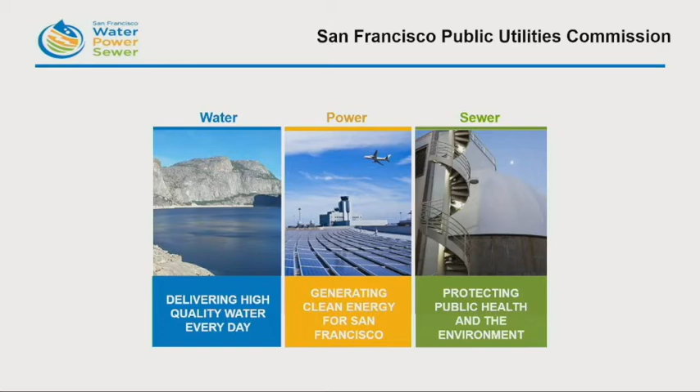We have adopted a One Water San Francisco approach to our resource management, and what that really means is moving away from a traditional water in, wastewater out model, really looking towards a more holistic approach to our resource management, and that involves strategies like on-site water reuse.

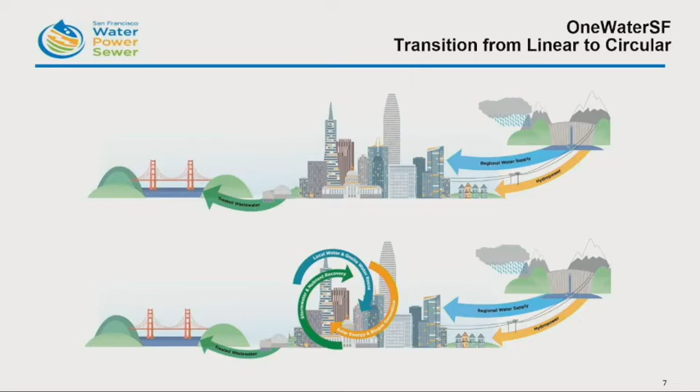On-site water reuse is fundamentally in line with our One Water SF philosophy because it's really about matching the right resource to the right use.

In San Francisco, we are focused primarily on our local water program in the Water Resources Division. And what that really involves is 4 key program areas: water conservation, developing new groundwater supplies, recycled water supplies on a centralized scale, as well as decentralized non-potable water systems.

I'm going to focus on this last program area today. Decentralized reuse is really a way that the utility is looking at expanding our water supply portfolio, recognizing that buildings produce water. So buildings, you can imagine there's a lot of different water sources that buildings can produce.

For example, rainwater, which is, just as a refresher, precipitation collected from roofs, stormwater, which is precipitation collected at grade, foundation drainage, which is really that nuisance groundwater that gets pumped out to sewers with sump pumps, gray water, which is wastewater collected from your clothes washers, your bathroom sinks, and your showers, and then black water, which is really all of your building's wastewater.

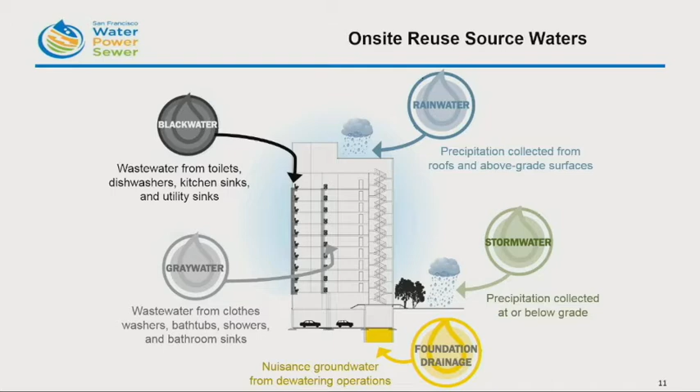On-site reuse is happening all throughout the world. It's not a new technology. I'm going to go through some examples.

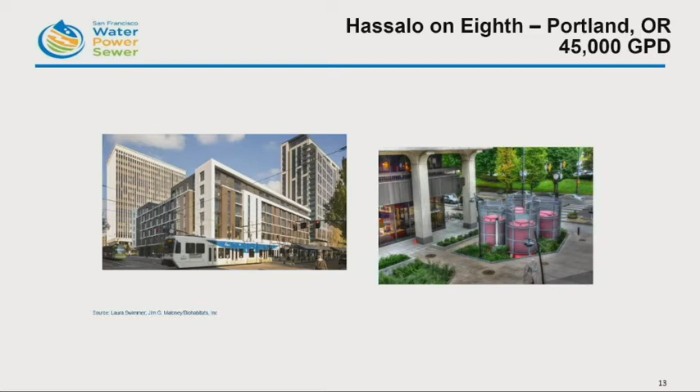For example, Hassalo on Eighth is a district-scale wastewater reuse project happening in Portland, Oregon. They are harvesting wastewater from 4 urban city blocks, treating that and reusing it for toilet flushing, cooling, and irrigation within that whole downtown area.

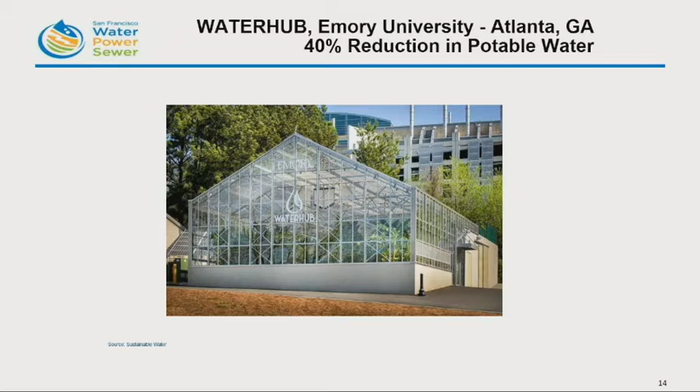The Water Hub is another example of a wastewater reuse project happening in Atlanta at Emory University. They are capturing and treating that wastewater for cooling purposes as well as future residential buildings' toilet flushing, and they're achieving a 40% reduction in potable water use with that system.

So as I mentioned, there's interest from both the utility side in terms of developing new local water supplies to make our supply and portfolio more resilient. But there's also been interest from the private sector as well that's interested in doing innovative and sustainable things to get LEED credit and meet their own sustainability goals.

The PUC headquarters building has an on-site blackwater treatment system where we're using an engineered wetland to treat all of our building's wastewater, reusing that for toilet and urinal flushing in our building. And we've been able to offset 60% of our water consumption with that system.

And then on the private sector side, an example is the St. Anthony's Affordable Housing Building, where they are capturing rainwater from their roofs and treating it and reusing it for toilet flushing.

In San Francisco, we are leading the way with our non-potable water program, which was established in 2012 through an ordinance added to our health code. That ordinance highlighted the roles and responsibilities of the 4 city agencies involved in administering our program. I can go into a little detail about who those players are.

The San Francisco PUC is involved with program administration, so that's tracking projects and helping administer the program, as well as another division within our organization that manages our cross-connection control program.

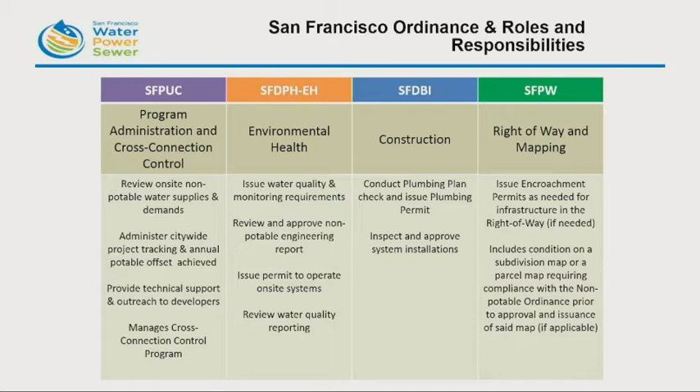We offer a whole host of technical and financial assistance to projects, designers and developers. Just a couple things I wanted to highlight: our non-potable program Guidebook, there's a couple copies up here, feel free to take those on your way out. That really highlights our 8-step permitting process that we've established and makes it user-friendly and easy to read on how to comply with our requirements.

Our Non-Potable Calculator is an Excel-based tool that helps projects understand what their water demands are on site for toilet flushing and other non-potable uses like irrigation, cooling, that kind of thing, and also determining how much volume you can get from supplies like gray water, rainwater, and black water.

And then our financial assistance, we have a grant program, our non-potable grant program, which offers grants for projects that are installing these on-site treatment systems and want some financial assistance to get that project going. We offer $100,000 grants, $250,000 grants, and $500,000 grants, depending on how much potable water your project is proposing to offset.

Our program has evolved over time. As I mentioned, it was established in 2012, and it allowed individual buildings to capture water on site, treat it, and then reuse it for non-potable applications. In 2013, the ordinance was amended to allow for district scale reuse, sharing water across two or more parcels for non-potable applications.

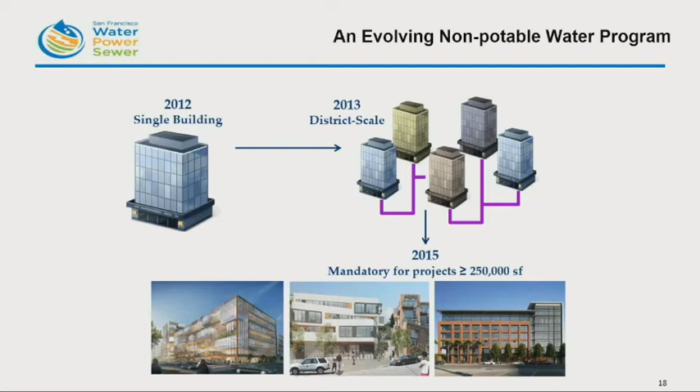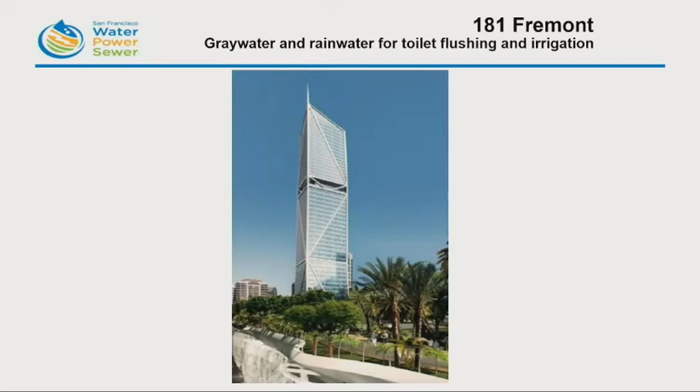Some examples of projects happening here in San Francisco: 181 Fremont is just commissioning their system, and they are doing gray water and rainwater reuse for toilet flushing and irrigation.

Salesforce Tower, many of you know, is the tallest building west of the Mississippi, and it's proposing to install a black water treatment system for toilet flushing, cooling, and irrigation.

The Chase Center is a mandatory project falling under that 2015 ordinance requirement. It's an arena for the Warriors basketball team being built in San Francisco's Mission Bay neighborhood, as well as 2 accompanying office towers. That project is capturing rainwater, stormwater, gray water, and condensate from those 3 buildings, treating it in one system, and then reusing it for toilet flushing and irrigation in the arena as well as the office buildings.

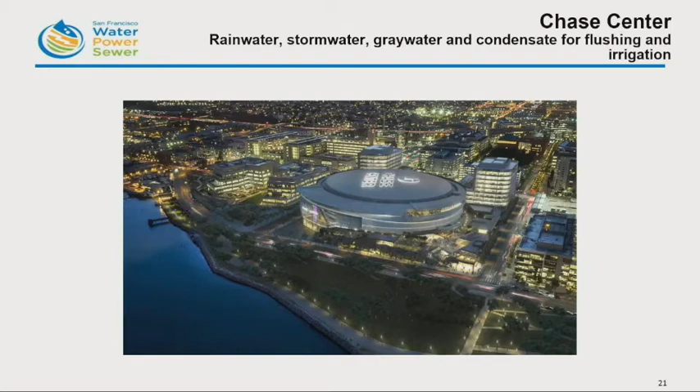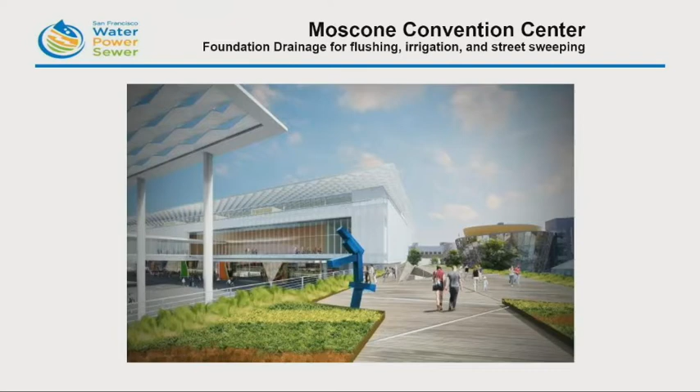Moscone Convention Center recently went through an expansion of their facility, and with that expansion, they installed a reuse system to reuse foundation drainage that's currently millions and millions of gallons of water being pumped to the sewer, so they decided they wanted to capture that. They treat the foundation drainage and reuse it for toilet flushing within the convention center, irrigation, and a street sweeping truck fill station to allow DPW trucks to come and fill up their trucks and then clean the streets of San Francisco.

We have spent a lot of time in San Francisco addressing challenges and barriers around on-site water reuse, particularly around water quality and governance issues. On the governance issues, we have collaborated on a national level through the National Blue Ribbon Commission for On-Site Reuse, which involves several different stakeholders throughout the country, water and wastewater utilities, as well as public health agencies, all coming together to address how to come up with a consistent way to permit and oversee these types of systems that's protective of public health.

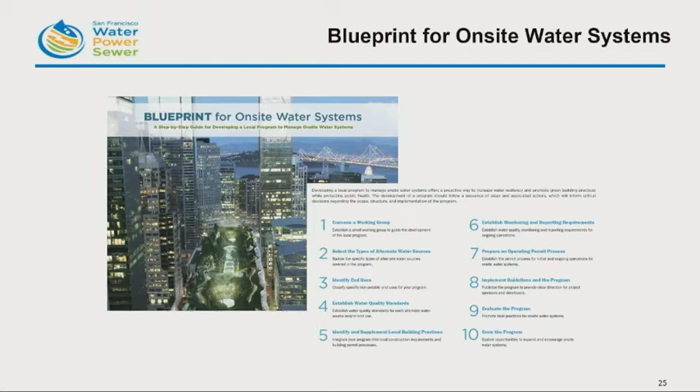Some of the efforts that came out of that include this blueprint for on-site water systems, which is a guidebook that goes through the 10 high-level steps you need to take to set up an on-site reuse program in your community.

On the water quality front, we've done significant research to address what appropriate water quality standards these systems should be meeting. I won't go into too much detail because Sarah's going to get into it in her presentation, but what came out of that research effort was this report. It's called the WERF report, and it established a risk-based water quality approach, looking at reducing exposure to pathogens like virus, protozoa, and bacteria. It's achieving water quality that's fit for non-potable uses, and the framework really emphasizes treatment processes and continuous online monitoring in real time.

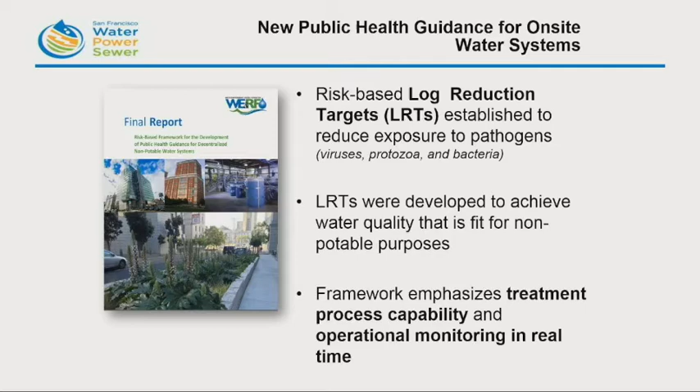As a result of the work we've been doing, many jurisdictions throughout the country have been able to move forward with this risk-based water quality approach, which is really exciting. In San Francisco, we amended our program in 2017 to update our water quality requirements to be aligned with these risk-based standards. In California, we sponsored Senate Bill 966, which directed the state board to develop risk-based standards on a statewide level for California for on-site reuse, and that passed into law last year.

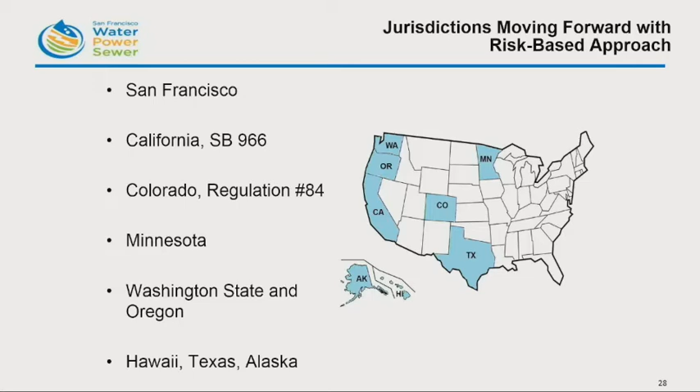Colorado amended their Regulation 84, which is allowing decentralized black water treatment systems in Colorado. Minnesota has published guidelines, and Washington and Oregon have recently introduced legislation similarly modeled on SB 966, and Hawaii, Texas and Alaska are a few other states that are following suit. So it's really exciting.

I'll end with this slide on some future work we are pursuing: a training manual for engineers, operators, utilities, and regulators. What that manual will do is identify the skills and knowledge required to design and permit systems under this new risk-based water quality framework. It's estimated to be completed mid-2019. So with that, I'll hand it over to Sarah.

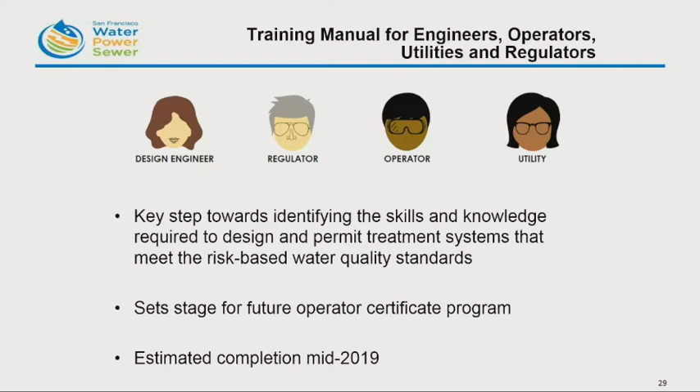All right, thanks, Taylor. So I'm going to talk a little bit more about what we're doing in San Francisco with water quality and treatment for on-site reuse systems.

As Taylor mentioned, in 2017 the San Francisco Department of Public Health updated the rules and regulations to incorporate these new risk-based pathogen log reduction targets. Our primary focus of doing on-site reuse is to protect public health. We really want to make sure that's a priority. So this framework emphasizes continuous online monitoring, making sure our treatment barriers are working, and also looking at our treated water quality.

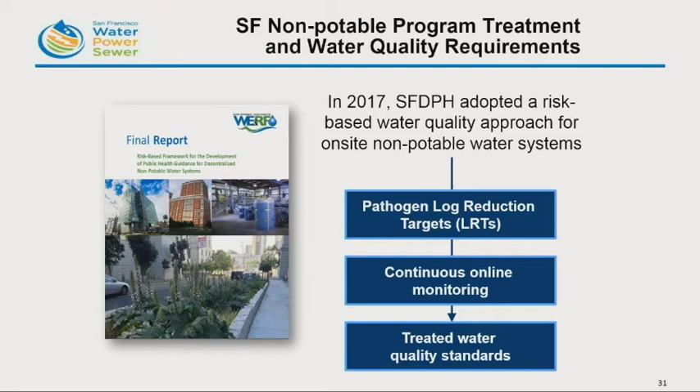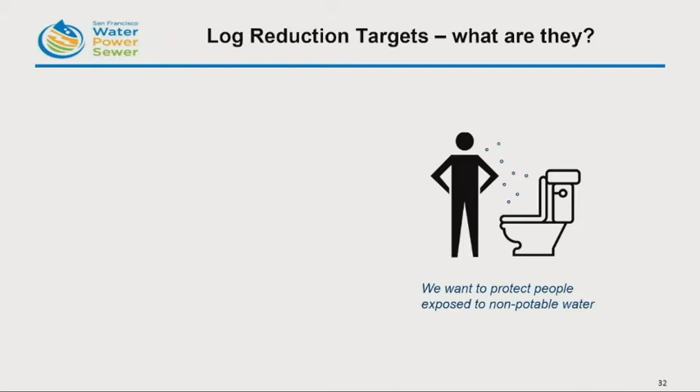So what are these mysterious log reduction targets? We want to protect people who are exposed to this non-potable water. When we use the water for uses like toilet flushing and irrigation, there is exposure from people to this water, and we want to make sure that it's safe. So we're targeting a certain water quality to be used when we flush our toilets and do irrigation.

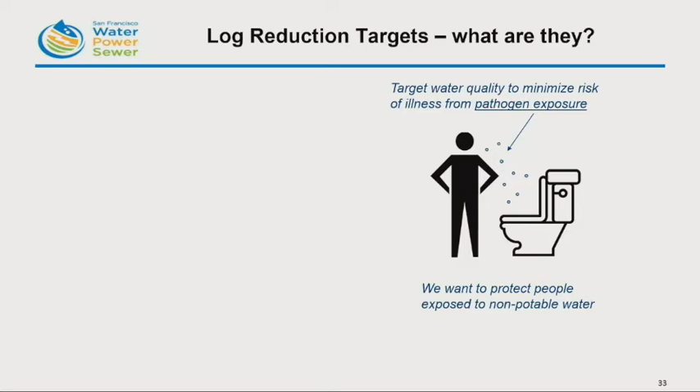And we have all of these different potential alternate source waters like black water, gray water, and rainwater, and these all have different water qualities. So we know where we need to get to at the end when we're flushing our toilets, and we understand where we're starting, and it depends on what kind of water we're looking at. The log reduction target is all about getting us from where we're starting to the safe place that we want to be.

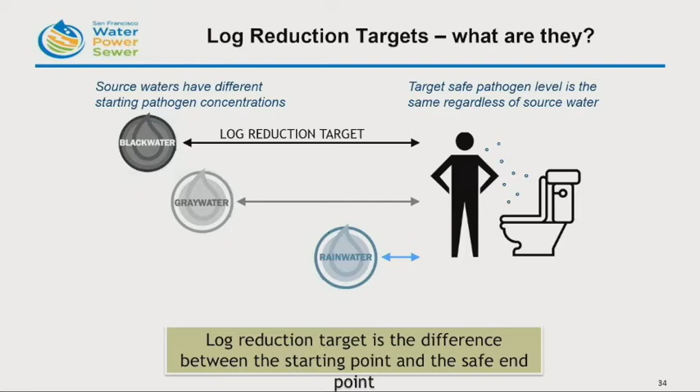The goal of these log reduction targets is to match each specific source water with the appropriate end use and create a water that is fit for purpose. Our LRTs are generating non-potable water. I just want to be clear that the goal is not to create potable quality water. This is fit-for-purpose water for toilet flushing, irrigation, cooling, and these other non-potable applications.

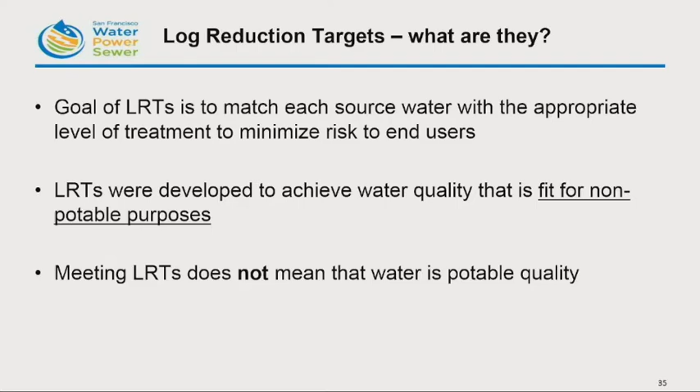So we really care about pathogens. That's super important. This is our main public health risk. But there's other things we need to think about when we're talking about picking treatment for these systems and making sure that the water quality is appropriate for the end uses.

So I've talked about the pathogens. The other main categories are organics and solids. What is that? That's all of the crud that's in this water - that's our poop, and that's all the detergents or shampoo or all the stuff that's coming into these different waters. And this can present a couple different challenges, because having all this stuff in the water can make it hard for our treatment processes to be effective.

And it can also be challenging to make this water aesthetically pleasing, which is really important for public acceptance of this water. And so when we're talking about organics, these are compounds that are in the water.

They can impact our disinfection processes. So when we chlorinate our water or when we use UV light, if we have too much stuff in the water, it can really impact the effectiveness of those and impact our ability to remove pathogens.

And also, if we end up with a bunch of organics in our water going out, that's basically food for bacteria that can grow in our pipes, creating this kind of colored, smelly water that we really want to avoid. And same with solids - these can also impact our ability to do disinfection effectively, and we also don't want this water to be cloudy and turbid when it goes in our toilets.

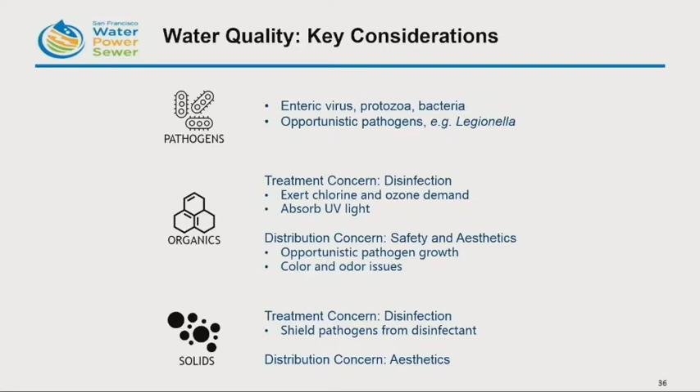And so this is just to give a rule of thumb of what we're expecting to see with these different source waters. I really want to emphasize that the water quality of these can vary really significantly based on site-specific conditions.

And so if you're somebody designing a treatment system, it's really important to consider your specific type of building, commercial versus residential, the type of fixtures that are there. You know, in San Francisco, all these new buildings have low-flow fixtures that can impact how concentrated these waters are.

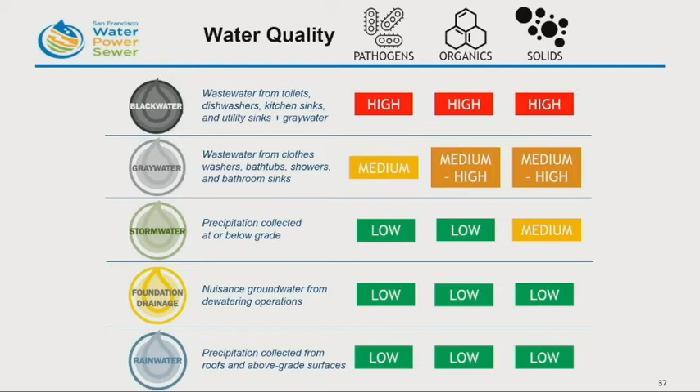But obviously, in general, we would expect that black water is going to have the most crud in it. And we're seeing that gray water can also have, because of things like low flow fixtures, pretty high organics concentrations as well. And then moving down, we're obviously going to expect to not see a whole ton in rainwater that's being collected from a roof.

And so once we kind of understand the water quality of these different source waters, it's important to identify the appropriate treatment so that we can meet our pathogen log reductions and meet our water quality standards. And so depending on the type of water you're treating, you might need different types of treatment.

So just some things to consider, if you do have black water or gray water with really high organics, probably biological treatment in some form is going to be the best way to do that, whether that's a membrane bioreactor or whether that's the engineered wetland type of system that we have in our own headquarters.

And then filtration is going to be the most effective way to remove solids. And again, there's so many different types of technology that I won't go into, but it's important to identify what's in your source water and where you're trying to get to in order to pick an appropriate technology. And then finally, disinfection will be our final barrier against these pathogens that we're trying to remove.

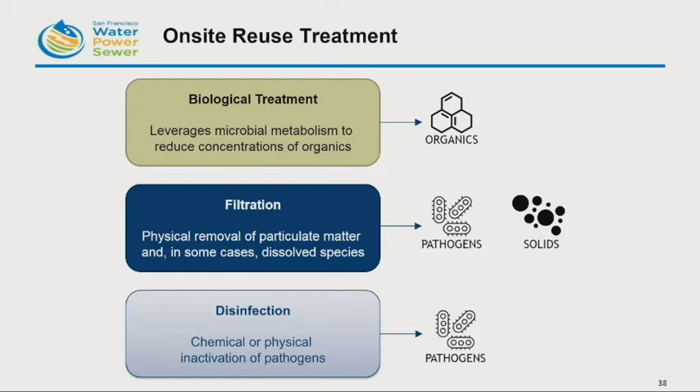So I just want to give a couple examples of some treatment trains. The top one is an example black water treatment train. This is not the only possible train, this is purely to illustrate an example.

But this is showing the use of a membrane bioreactor, which combines biological treatment and filtration into one process. This can be a really effective way to get a lot of treatment done in a pretty small footprint. And then followed by some UV and free chlorine disinfection. My little boxes here are just illustrating the importance of using online monitoring to verify that all of our treatment barriers are working as we want them to be working.

And then in contrast, the rainwater system that I'm showing on the bottom can be a little bit simpler because, as we saw, we don't have as many pathogens, solids, or organics in there. So you can use a simpler type of filter followed by some free chlorine disinfection. So again, we're really trying to provide the right amount of treatment for a particular source water.

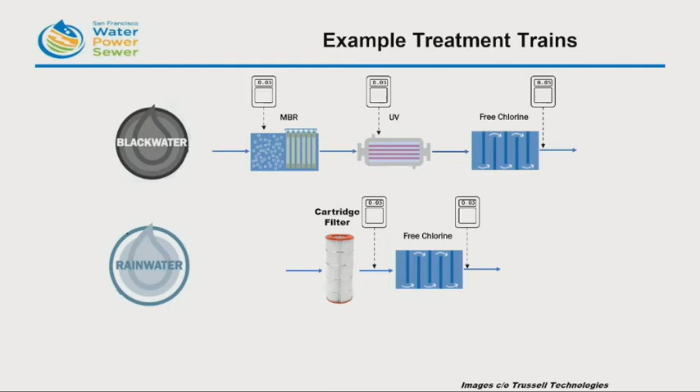And I'm going to just talk about a couple of lessons learned that we're learning as we implement this program and some new things we're thinking about moving forward. So just some things we're seeing for treatment design of these alternate water source systems.

With black water, as I mentioned, color can be a really important consideration for treatment. If somebody goes into a bathroom stall and they see yellow water, they may flush the toilet before using it, which is kind of defeating the whole purpose of conservation in the first place. So there are technologies that can be used to address that issue. Free chlorine, ozone, these oxidants can be used to reduce the color of this water.

As I mentioned, gray water - we are seeing that in San Francisco with all of our low flow fixtures, we can end up with pretty high concentrations of organics in gray water.

And so we may need to be seeing biological treatment being used in these gray water treatment systems. And with rainwater, I want to highlight the importance of, if doing rainwater harvesting, consider how you can maximize the benefits of both non-potable reuse and stormwater management.

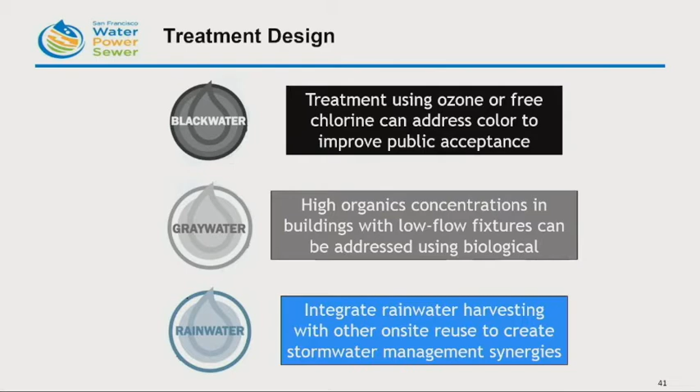As we move forward, we're really focused on, as these systems come online, getting more data, improving our technical assistance to projects, learning more about how much water our buildings are generating and the patterns of how they're using water, things that can help us improve the design of these systems.

We're also working toward an operator certificate program to make sure operators have sufficient capacity to keep these systems working effectively. And we're supporting additional innovative efforts in San Francisco.

Things like breweries who want to reuse their process water on site, and also things like atmospheric water generation, integrating heat exchangers into on-site reuse so we can improve energy efficiency.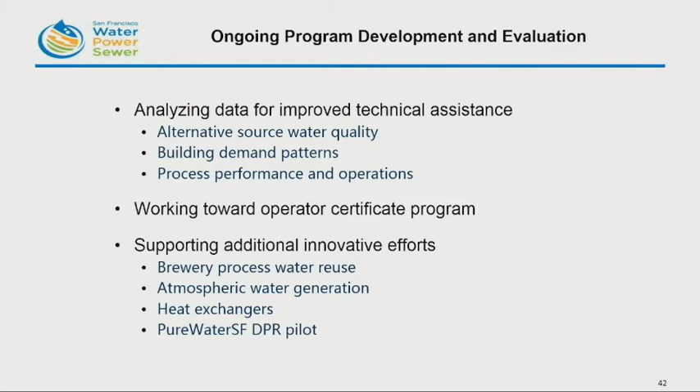And we also do have a potable reuse pilot going on in our building. If you want to learn more, we're happy to talk more about that.

So implementing a first of its kind non-potable program takes time. It takes many dedicated stakeholders. It's an ongoing effort, and we are always continuing our research and planning efforts. We're looking forward to gathering new data, improving our technical assistance, and moving this industry forward.

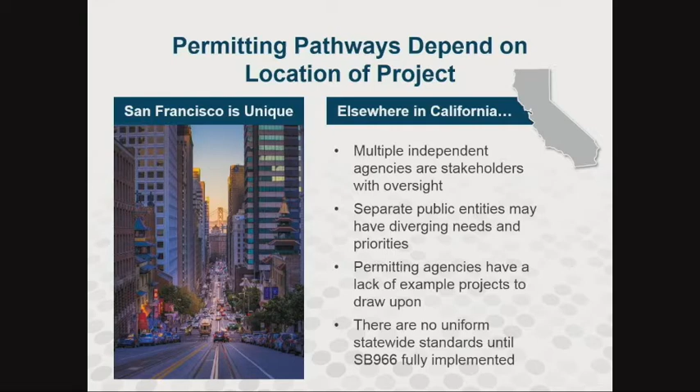And this is a summary. It was the first of its kind in the nation, on-site reuse legislation, and there's a few years on this before it's fully implemented, but by December 2022, we expect to have statewide regulations on public health-based standards for these systems.

And by 2023, building standards. And as Senator Wiener pointed out, what this is going to do is it's going to give cities the tools that they need to really advance water recycling in the on-site reuse area.

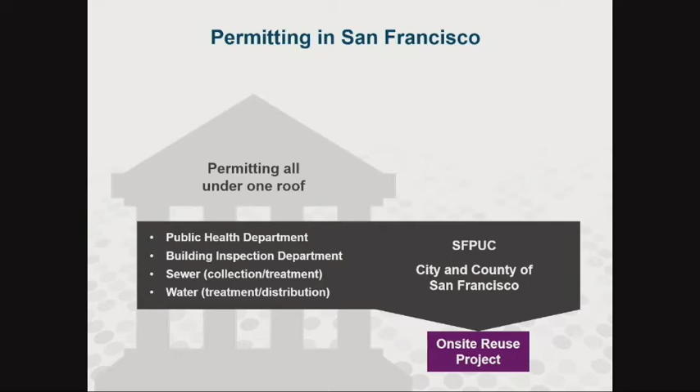And I want to put this up to summarize what I was saying, which is that if you're in San Francisco, the permit process flows very smoothly, easily. And not to say that it doesn't flow smoothly outside of San Francisco, but you have a few more agencies that might be involved.

In fact, this illustrates what you might find if you're proposing a project elsewhere: a rainbow of permitting options. And at the very top of that is the Regional Water Quality Control Board. Here in California, the Regional Water Quality Control Boards and the Division of Drinking Water are responsible for promulgating and making sure that Title 22, which is the state water recycling regulations, are adhered to.

Here in San Francisco, because they already have a permitting program developed and approved by the state, they have permission to issue permits on their own. But elsewhere, at least until SB 966 is fully implemented and cities adopt those regulations, for the next 3 or 4 years the regional board and DDW will be involved in permitting a system if you want to implement it.

These systems produce water to reuse on site, but they also produce a waste stream from these membrane bioreactors, and that has to go somewhere. It typically goes to the public sewer, where the sewer district and possibly the municipal wastewater treatment plant will want to review that discharge to make sure it works with their operations. We're also likely to see separate health and building departments involved, and county health departments often handle cross-connection tests, so you need to coordinate with them, as well as the air district or a separate water entity.

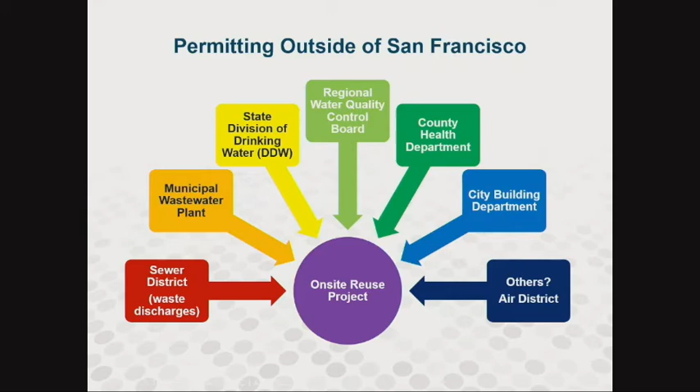It doesn't mean the process is harder, there's just more people you need to coordinate with up front, and it can still go smoothly as long as you're aware of all the permitting agencies that may be involved. The big takeaway: before you design a system, find out who the permit stakeholders are, who has an interest in this, and meet with them early to find out their requirements and avoid surprises. Because if they're surprised, you may find you need to make changes, or your project may be delayed.

I put these up here - not all the things you might find, but some ones I want to draw your attention to. As I mentioned, the first several involve the waste discharge from these systems.

Sarah talked about water clarity and needing to remove organics. These systems are very site specific. For some, it may make sense to put in a reverse osmosis treatment system, and if you do, you typically generate a brine. You might think the salts just end up more concentrated and that would go to the sewer system - it's already there, just more concentrated. But if the agency you're discharging to already has a municipal wastewater recycled water program with high salt concentrations, you may need to look at other options for disposing your brine, or go with a different process, possibly an ozone process.

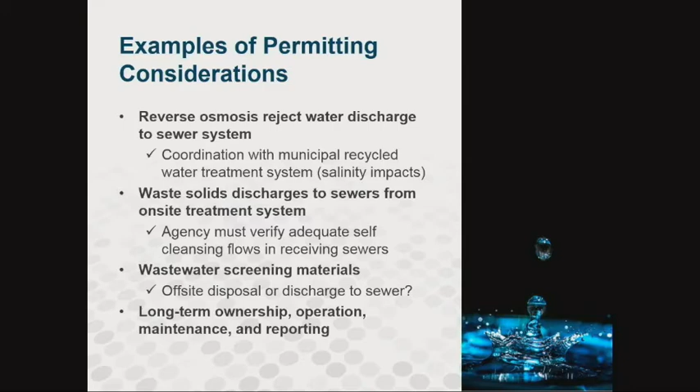San Francisco has standards for operator certification, and as part of the Blue Ribbon report that's being developed, that's something you want to have lined up when you go in, to make sure your project will meet those requirements.

Lastly, I want to share a couple of examples outside of San Francisco of projects that took a different permitting pathway. One is the Facebook system by the Dumbarton Bridge at their headquarters in Menlo Park. It's in permitting now and hopes to be operating later this year.

It's a membrane bioreactor that will treat about 90,000 gallons of wastewater from several buildings on their campus for toilet and urinal flushing, using a membrane bioreactor and reverse osmosis. This system was provided by Aquacell, which does a lot of these systems.

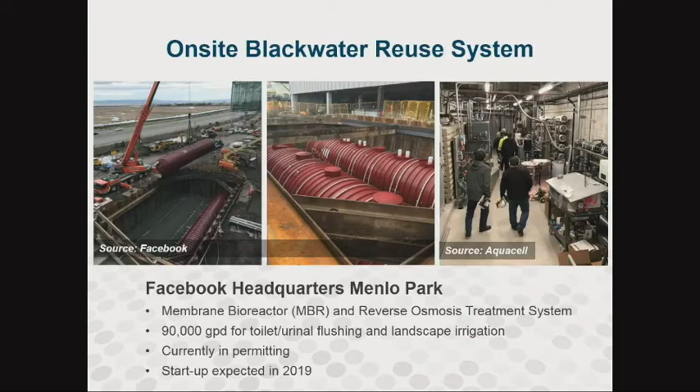The other one is Microsoft, a little further south in Mountain View, which is expanding their campus. They're in the process of permitting and will be constructing that, hopefully operating next year.

It's going to be net zero for non-potable water, so the only potable water used will be the drinking fountains and sinks in the building. It's going to reuse all the wastewater on site, about 4 million gallons a year, and will also incorporate some rainwater into that project.

I also wanted to acknowledge Natural Systems Utilities, Sherwood Design Engineers, and WRNS Studio, who were project proponents and partners in that project.

A number of us just returned from the State Water Reuse Association Conference, held in Los Angeles this year. A few years ago we might have seen one or two papers on on-site reuse; this last year there were two complete sessions on on-site reuse, showing the growing interest in this topic.

By the way, for those interested in learning more about trends in water reuse, the conference next March will be here in San Francisco. I encourage all of you to attend and check it out.

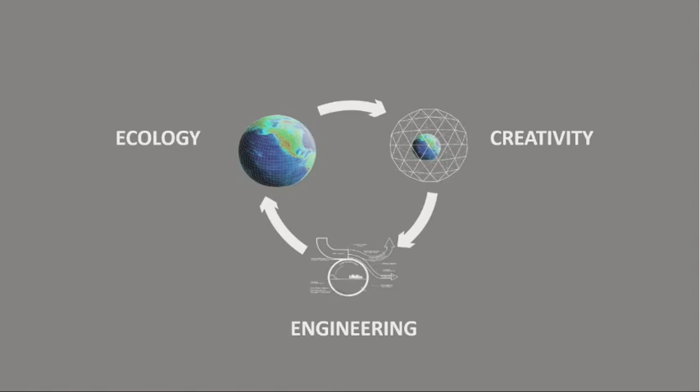Sherwood Design Engineers focuses on the intersection of ecology, creativity, and engineering, working in a very interdisciplinary fashion. We are a full site civil engineering firm.

So just to start the conversation, why are we doing this? What's the rationale? I think Taylor and Sarah did a great job walking you through why the City of San Francisco has taken on such initiative in on-site reuse. So understanding why, either outside San Francisco or if not required, you might take on an on-site reuse project. Who are the project stakeholders? That was really covered, so I won't go into it much here, but it ranges from the design engineer to the utility to the regulator and the operations side.

What project at what scale? I'll get into that a bit in this presentation. Financial feasibility I'll also touch on—it's very site specific, so there's no one solution for how you might look at the finances for one of these systems. And future readiness and phasing—I'll talk about that when we discuss benefits.

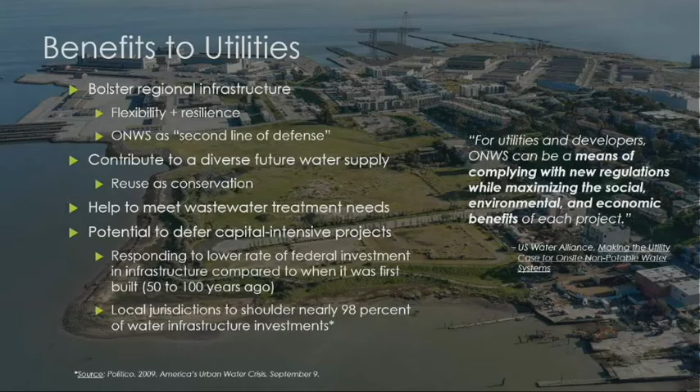I think we're going to keep going here. How do you pay for this investment, right?

So that's kind of from a private perspective. This all seems fine and good, but it seems like it takes a lot of money.

So I think first we want to understand that we're in a changing infrastructure environment. We're in a world where there's not as much investment coming in from the federal side as there may have been when this infrastructure was first built.

So making sure you're assessing the true costs of the project if you weren't going to build such a system, and assessing life cycle costs to determine any first cost offsets. So if you build this system, might you not have to build something else? I mentioned some of the less tangible benefits.

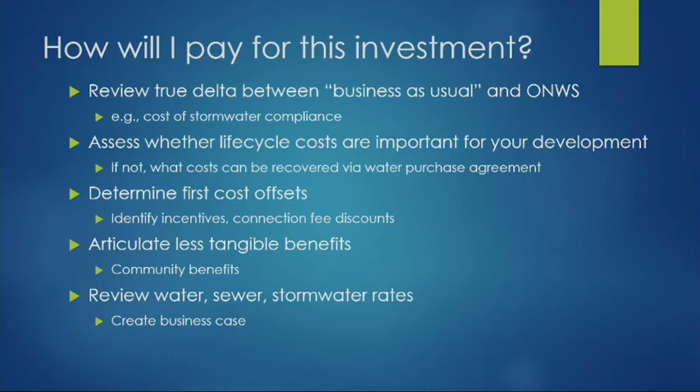Keeping in mind that water infrastructure is also not optional. It's not a question of should I invest in it or should I not - you're going to invest in it, and so we just need to do it in a smart way.

But sometimes we are starting to see that there are simple paybacks that you can do. There may be an opportunity to demonstrate a real business case for implementing some of these systems.

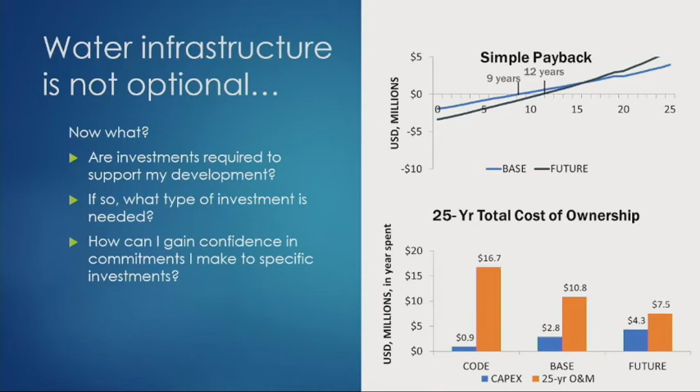So if new investments are required, what's the type of investment, and how can I gain confidence early on in my project that this is the right investment? Focusing on those questions really early on will make sure your project is successful, that you've chosen the right project at the end of the day.

So you can insulate yourself from these rising rates of water and sewer. You can potentially reduce some of your connection fees. I'll give the example in San Francisco, you do get a credit for your water meter connection based on your non-potable system. So there's crediting systems like that.

Also ways for utilities to gain some income back if people are buying less water - more water conservation means there's fewer folks buying that water. So shifting from a volume rate to more of a fixed rate and finding other revenue streams for utilities, making sure it works for both parties.

I mentioned the return on investment and other benefits. Maybe if you build a system like this, you are actually enabling yourself to do something more creative with a site that you wouldn't otherwise have been able to do.

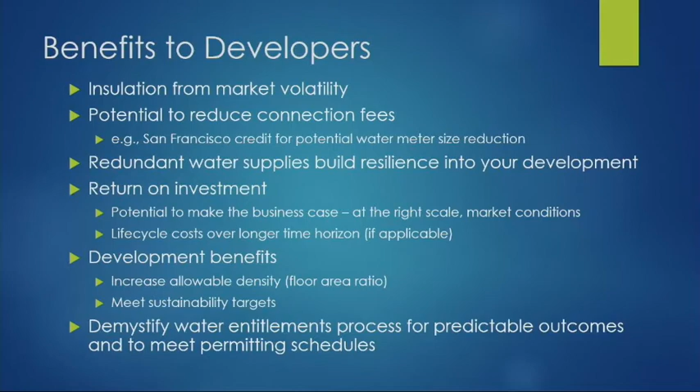But at the end of the day, Dawn touched on the permitting process, and I just wanted to highlight this - during Q&A we can get into it if there's time. One of the most important things that structures like the PUC and others nationwide are setting up is that they're demystifying the process for developers, so you can have assurance that you're going to build the right project, but also know you're going to have the regulatory framework and bodies you need to get that project approved in time, and that you're going to have the water that your project needs to move forward.

There are changing market demands in our water infrastructure, and the way we think about typical investments is shifting. So how are we as a market going to adapt to this changing thinking in how we invest in water infrastructure? We think on-site non-potable water systems can be a transformative opportunity for how urban centers of the future address water supply, but there's a risk those benefits won't be realized if we don't consider all the pieces of the puzzle, or layers of the onion. A one-size-fits-all approach will not work.

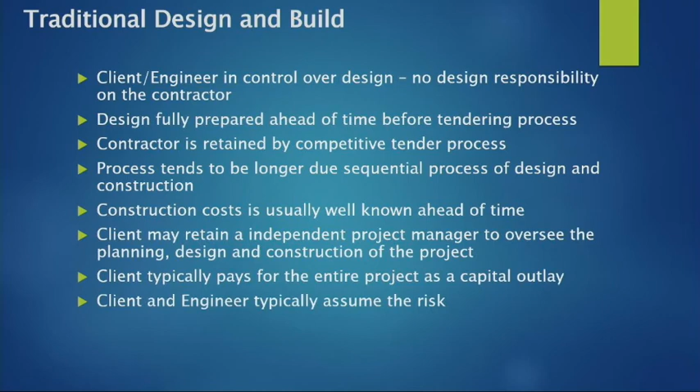Now we go to design, transfer, build. Pretty similar, except this time the client works with an engineer on a conceptual idea. This happened with Google—they worked with an engineer and said, look, we want an on-site rainwater capture system, we want to do a black water system, we want this and this. They came up with this great idea, and then they went into a competitive bid process looking for a contractor.

A contractor looks at their concept, which is kind of rough, bids on it, and then it goes over to the contractor. The contractor becomes pretty responsible—in fact, the contractor works directly with Google on this. What's interesting is that construction and design can often happen at the same time. You can start putting in pipes while you're still tweaking the design—that's something to keep in mind.

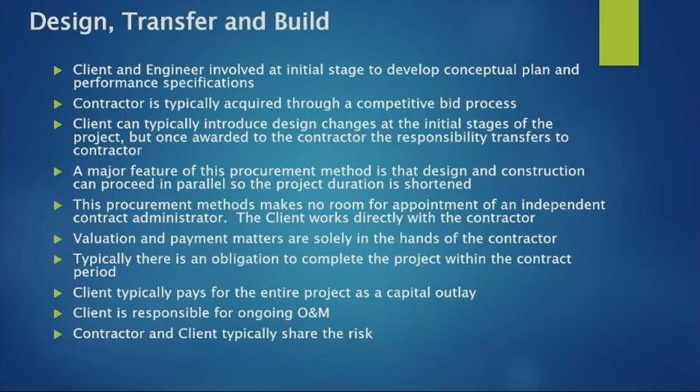In this one, again, the client pays for the project as a capital outlay, and the client is responsible for O&M along with the contractor. So how's that different from before? Before it was the engineer and client who bore the risk. So if something goes wrong here, who's at fault? The contractor.

Okay, this is my favorite—the DeBoom. I love saying it like that: Design, Build, Own, Operate, and Maintain. Now this is really interesting. I come from the solar industry, and when we began to have power purchase agreements, when we began to be able to lease systems to commercial buildings, all of a sudden we saw a huge difference.

We saw adoption, and I really believe that with SB 966, all the work that Paul has done, if we can partner this with DeBoom, it could be a really big thing. Because what it is, you have the contractor who actually owns the system, so they deal with the engineering, the design, the permitting, the installation, the ongoing, often very rigorous O&M, like we have to report our water quality results. It's a long-term thing. So now the client steps out of the risk completely.

And what happens is the cost of the system, the cost of the ongoing service and maintenance, all of that is rolled into a fixed monthly payment. So say you have a multi-tenant housing, you can now divide up that cost and pass that on for the cost of recycled water. It's usually a long-term contract, like 10, 15, 20 years, and then it'll go back to the original owner. This is going to be a deal breaker. I'm really, really, really excited about this.

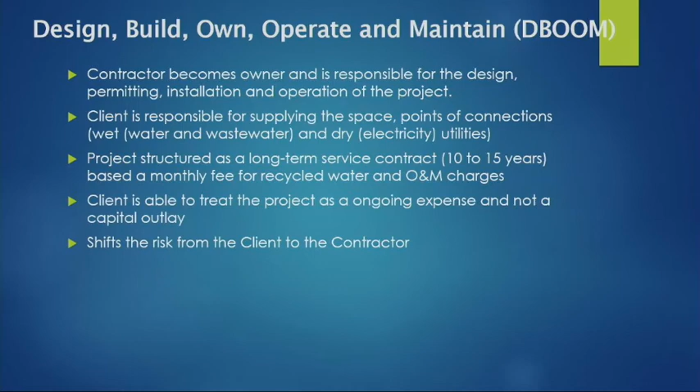So that's it, and I can pretty much end here, to be honest, because we went through P3, which is another exciting thing. We're looking at the P3 partnership. I think that's huge right now in the city of Santa Cruz. We're pretty much maxed out on our wastewater system. Where our purple pipe goes is pretty much fixed. Our infrastructure, we don't have enough money to build it.

But we have developers that want to put in resorts, and they say, hey, we'll partner with you, we'll pay for this, we'll put in the infrastructure, we'll put in that purple pipe. And then after a period of time, we'll give this back to you. Of course, we're going to make money, but it's a good way to get in and build that infrastructure. So anyways, I'm pretty excited. I think these are deal breakers, and hopefully I was fast. Thanks.